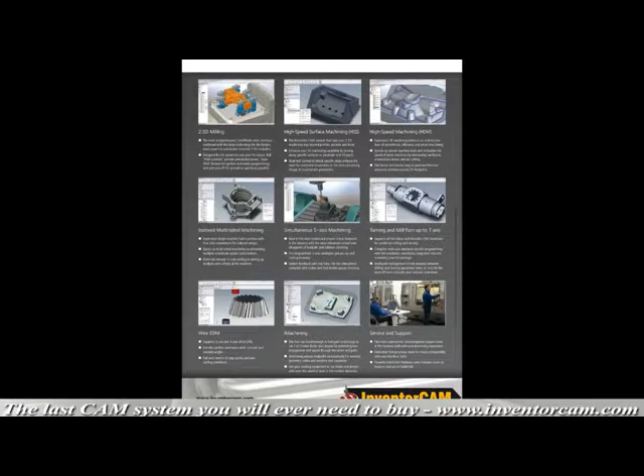InventorCAM has packages that grow right alongside your business. Add a new machine, InventorCAM can program it. Need to cut in more axes? InventorCAM can do it. You simply will not outgrow InventorCAM. It will be the last CAM package you will ever have to buy. Now let's briefly look at the packages in more detail.

2.5D milling. InventorCAM has the most straightforward Inventor-style interface combined with the latest technology for the fastest, most powerful, and easiest way to create 2.5D toolpaths. InventorCAM was designed for the advanced user and the novice. There are full pilot controls that provide unmatched power, and even an autopilot feature recognition that automates the programming and gets you off the ground as quickly as possible.

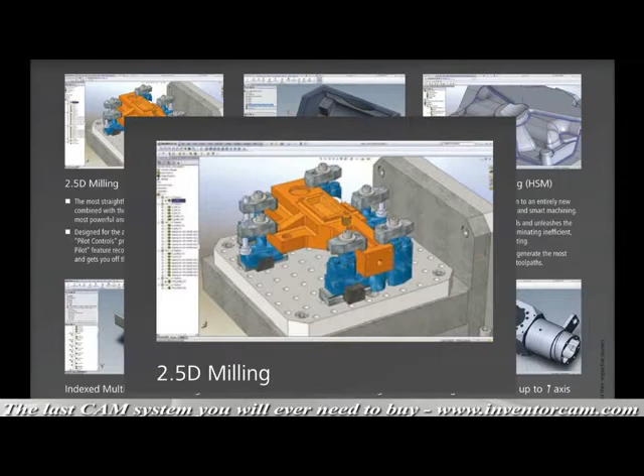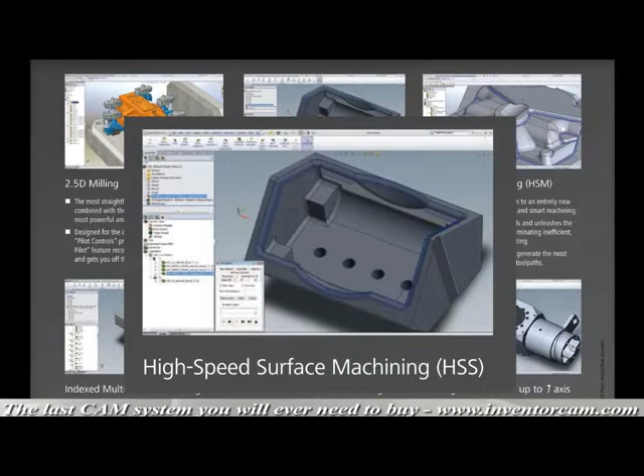HSS High-Speed Surface Machining. This distinctive CAM module takes your 2.5D machining way beyond profiles, pockets, and faces. It enhances your 3D machining capability by driving along specific surfaces on prismatic and 3D parts, with total tool control to attack specific areas without the need for constraint boundaries or time-consuming construction geometries, perfect for doing undercuts and using shaped tools.

HSM High-Speed Machining, the new level in 3D milling. Experience 3D machining taken to an entirely new level of smoothness, efficiency, and smart machining. HSM speeds up slower machine tools and unleashes the speed of faster machines by eliminating inefficient, unnecessary moves and air cutting. This is the fastest and easiest way to generate the most advanced and best quality 3D toolpaths in the business.

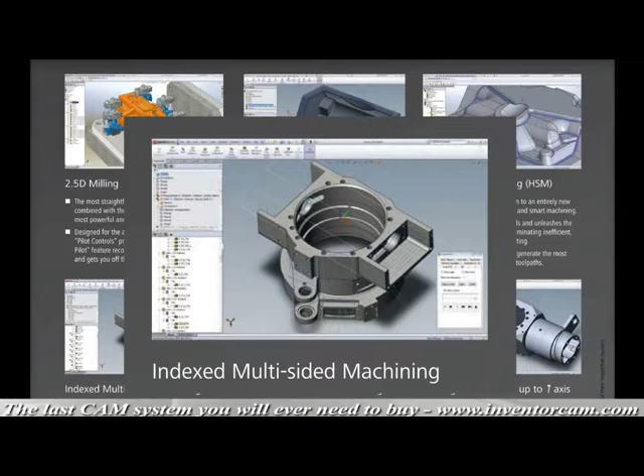Indexed multi-sided machining. Experience single machine home position with one-click orientation for index setups. Speed up multi-sided machining by eliminating multi-coordinate system constructions, and eliminate manual G-code editing or setting up multiple work offsets at the machine.

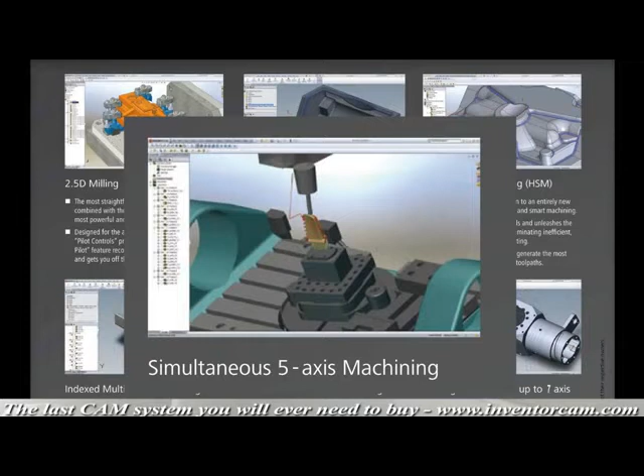Simultaneous 5-axis machining. Trust in the most tested and proven 5-axis toolpaths in the industry, with the most complete control over all aspects of toolpath and collision checking, complete with pre-programmed 5-axis strategies to get you up and cutting extremely quickly. The 5-axis package provides instant feedback with real-time, lifelike simulations, complete with cutter and tool holder gouge checking.

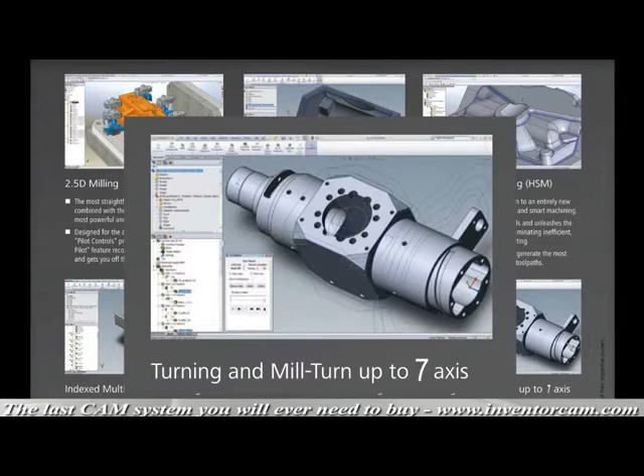Turning and Mill-Turn up to 7 axis. Providing an outstanding solution to the hottest growing segment in the machining market, our Turning and Mill-Turn package supports all the latest multifunction CNC machines for combined milling and turning. We have complete multi-axis and back spindle programming with full simulation, seamlessly integrated into one extremely powerful package. InventorCAM features intelligent management of rest material between milling and turning operations that limits air cuts for the most efficient toolpaths and reduced cycle times.

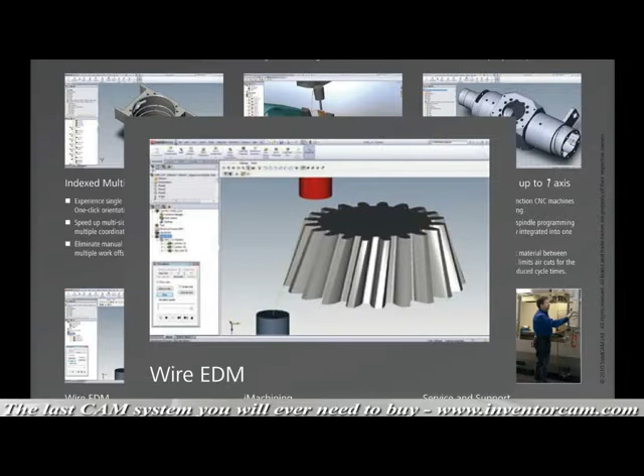Wire EDM. Not just an afterthought like some CAM systems, our Wire EDM is state-of-the-art and supports 2- and 4-axis Wire EDM at an entirely new level. It handles profiles and tapers with constant and variable angles, with full user control of stop points and wire cutting conditions. This is a full-featured, state-of-the-art Wire EDM package.

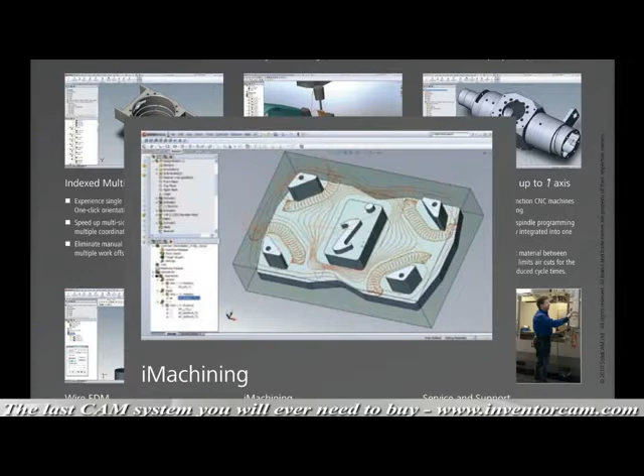iMachining, the first real breakthrough in toolpath technology that cuts 2 to 3 times faster and deeper by optimizing tool engagement and speed through the entire toolpath. iMachining adjusts toolpaths automatically for material, geometry, cutter, and machine tool capability. Use your existing equipment to run faster and deeper with even the smallest tools and the hardest materials. Unlike other systems that leave you guessing at speeds and feeds, iMachining even has a speeds and feeds wizard with 50 years of machining intelligence. It speeds you through the entire iMachining process.

InventorCAM has achieved the coveted Certified 2010 Partner Product Certification. Unlike other CAM systems that just sort of work with Inventor files, we are a certified partner, which is the highest level of integration possible. And we are one of the first ever CAM partners with Inventor. You simply won't find a deeper or higher level of integration than InventorCAM for Inventor.

One of the features our customers say they like most is the Inventor look and feel of our user interface. By running right inside Inventor, the InventorCAM menu looks and feels just like Inventor, so you're never having to use an unfamiliar interface to do your CAM. We've even created a CAM toolbar to be right at your fingertips, so you don't have to go far to do your CAM functions.

Now, of course, your standard feature tree is still going to work for Inventor. We've just incorporated our CAM manager into a very feature tree-like function. If you know Inventor, you know InventorCAM.

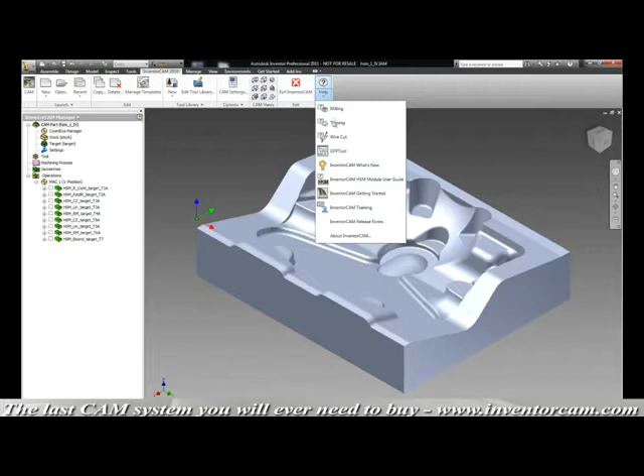Moving to our InventorCAM help menu, you'll see it looks, feels, and acts exactly the same as Inventor's. It contains help topics, getting started guides, videos, and everything you need to get up to speed as quickly as possible in InventorCAM.

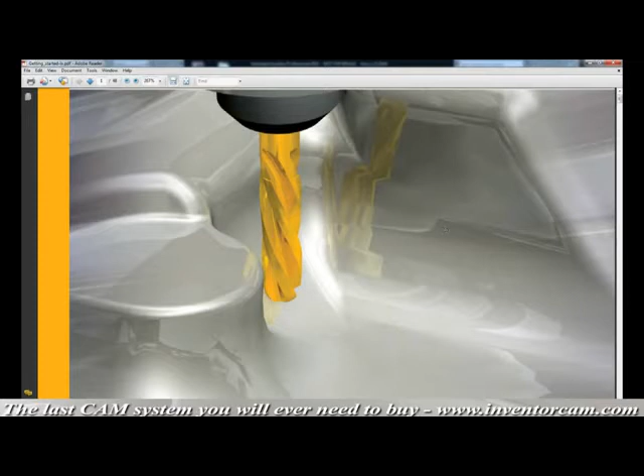Here we're going to show you one of our strongest features, called associativity. When you have a pre-programmed part like you see here, with pockets and holes already set with tool paths, the system will automatically update those tool paths when changes are made.

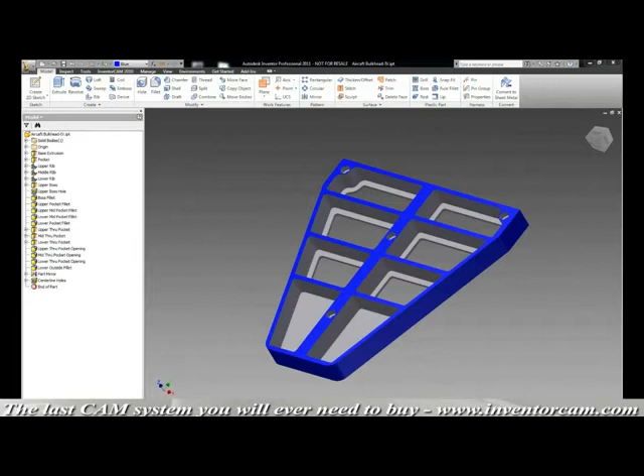Here we're stretching a part that will obsolete every tool path for the pockets as well as the holes. We're going to show you the existing tool paths and how they're completely out of sync with the actual part. Now we're going to go to our CAM manager to synchronize the part. It will update those features and automatically regenerate those tool paths.

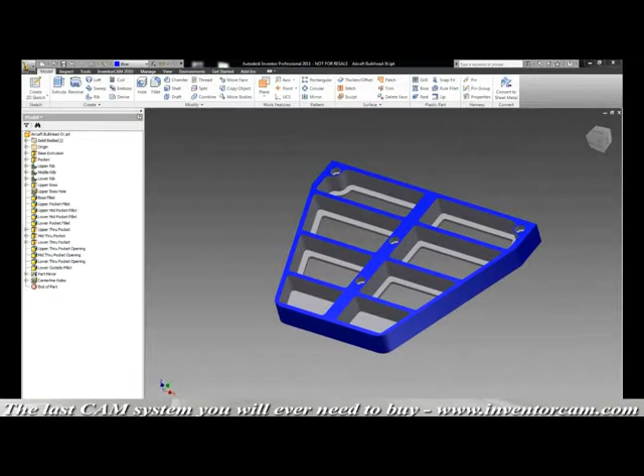So what about parts that are edited by someone outside of the CAM team? Say an engineer in the design department calls up a file like this, and makes the same changes we did before. They stretch that part, and every single tool path becomes completely out of sync with it.

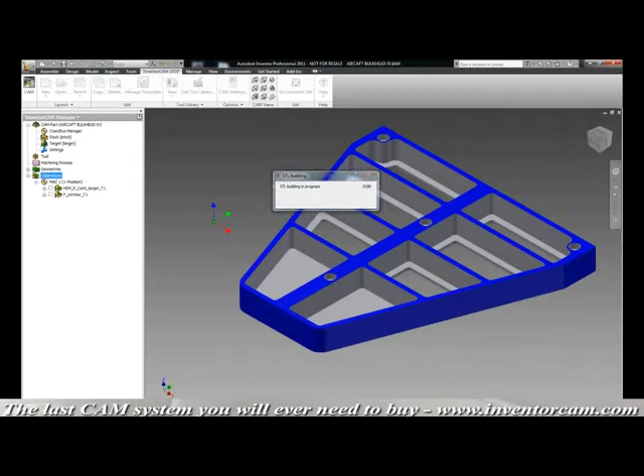InventorCAM is smart enough to know when that part has been changed, and when you open it up the next time, it will tell you that it's been changed, even if it was across a network. You can choose whether to have that part update, as it did here, or you can even ignore those updates.

Once that part is in, all you have to do is resynchronize as before, and those tool paths will update.

Another feature you will never get with a standalone system that isn't integrated in Inventor is the ability to use your Inventor sketches to actually define your geometry. Here we're going to define our geometry directly from the Inventor feature tree by picking the sketch.

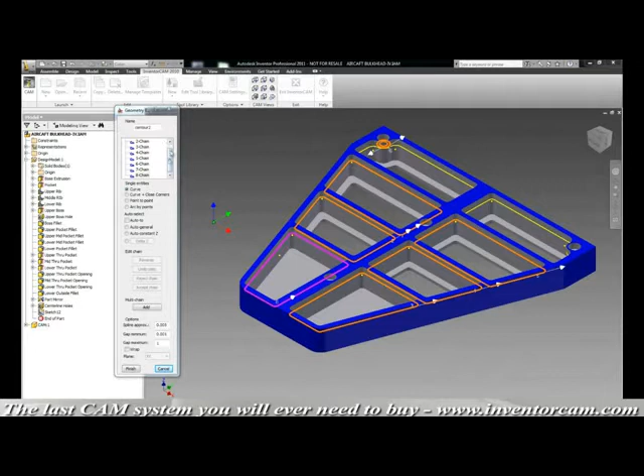Imagine if you had hundreds of pockets in that sketch. You can pick the sketch instead of spending an enormous amount of time picking those pockets one by one from the screen. So here we show that all the chains have been formed directly from the sketch.

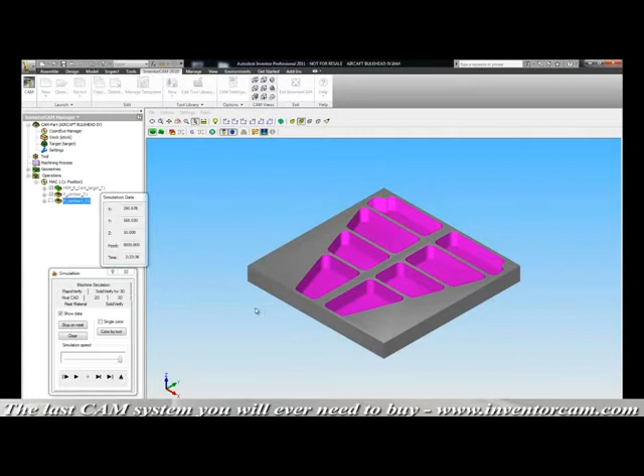At this point, we'll show you the simulation of the tool path. And we'll show another simulation that goes beyond just a simple tool path, to an Inventor model simulation where you can actually see the cuts in the stock.

Now those roughing cuts were made with a fairly large tool, which leaves the radiuses unfinished. We can use the rest material to automatically go back in with a smaller tool and just get the material that's been left behind.

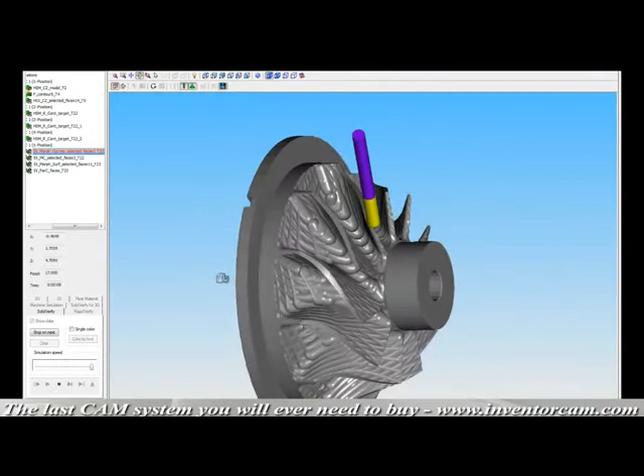Here we're showing that simulation of that tool just picking up the material that's left in the radiuses. This is another example of InventorCAM's amazing simulation tools.

Here we have a very complicated 5-axis part. We're using our Inventor verification tools to actually see the cutter going through the part in the stock, and you can see the progress, the approach angle, and exactly how it's being cut.

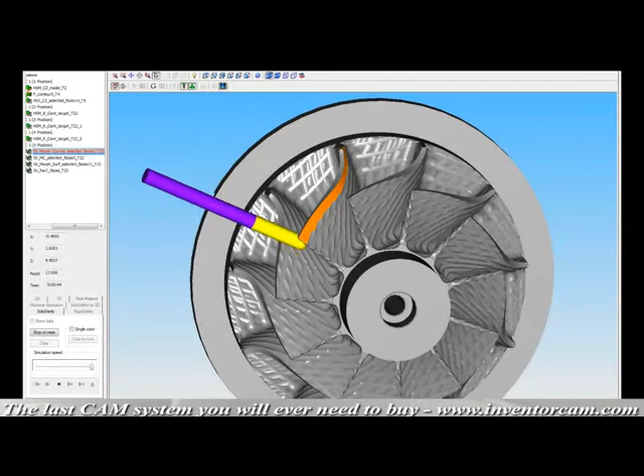And of course, we have full collision protection and gouge protection for this particular simulation.

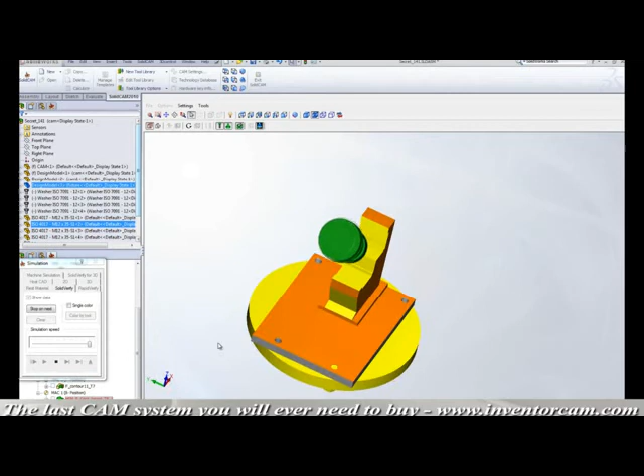Because InventorCAM works directly in the assembly model in Inventor, we can bring in the fixtures, vices, and clamps used in conjunction with the part itself. In this part, we're going to show the simulation and how we can include the actual fixture in the simulation, so you can see exactly how it will run on your machine.

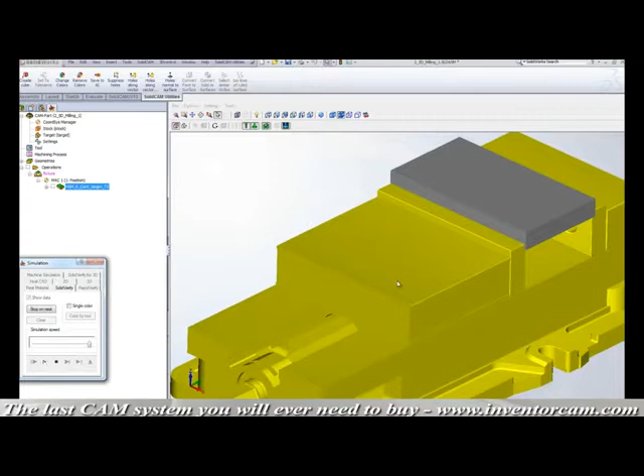For this example, we brought in a common vise to use with this simple part. We can actually designate specific parts as fixtures so they will not be included in the InventorCAM tool path, and will be avoided. Here we're showing in our Inventor model simulation how the cutter never makes contact with your fixture or vise as it goes round and round.

InventorCAM makes sure there is never any contact with any fixture that is being used to hold your part. As we zoom in on this upper corner, you will see your stock being removed, and you will see that your cutting tool never makes contact with the vise.

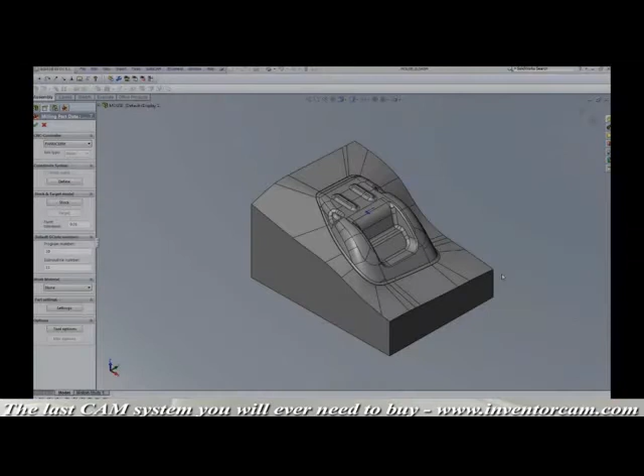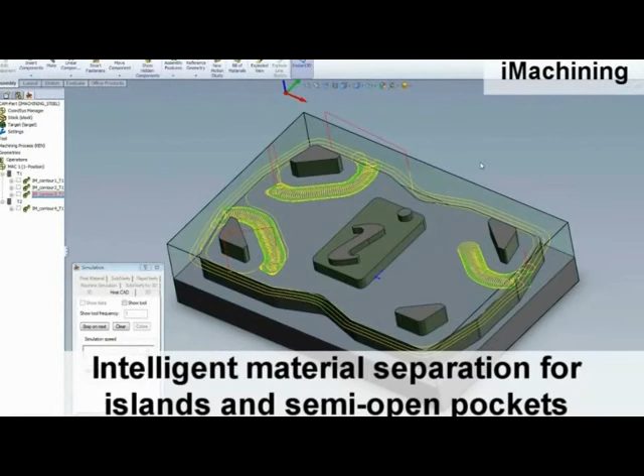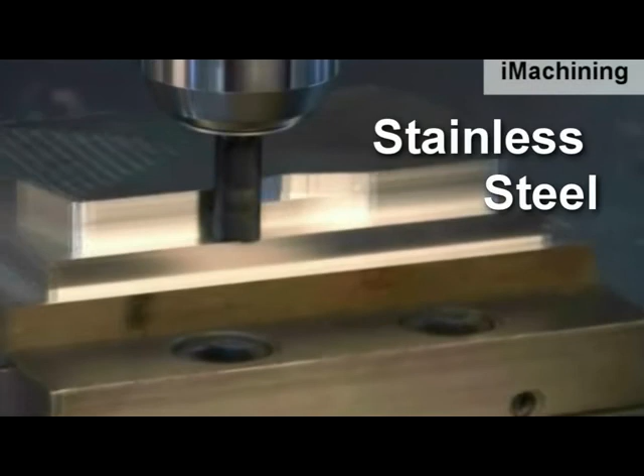With an ever-increasing demand to be faster and more efficient, iMachining gives you the tools you need to create smooth and morphing spiral tool paths that never allow your cutter to get over-engaged. This creates intelligent material removal, complete with separate strategies for islands and semi-open pockets. The results are more efficient toolpaths by automatically increasing machining and programming speed, as well as cutter efficiency by as much as 2 to 3 times.

Now that you have seen what we offer in SolidCAM, you can see there is no reason to use anything else but SolidCAM, integrated in SolidWorks for all your design and manufacturing.

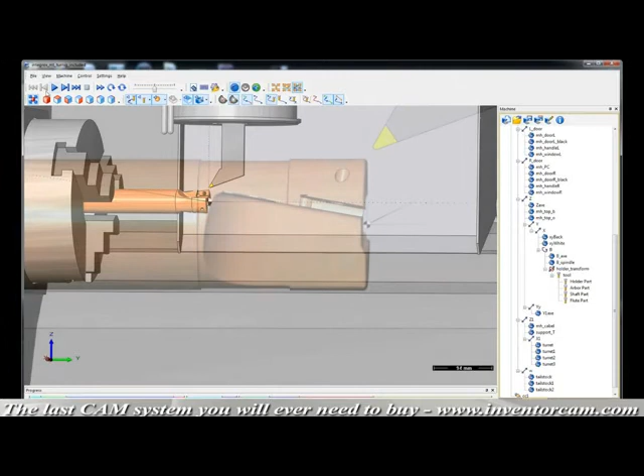One of the hottest growing segments in the machine tool market are Mill-Turn machines. These machines combine milling and turning functions on one machine, but can be extremely complicated to program.

We start by zooming in and show a face cut on the turning. Then we zoom into a side cut on the turning as well. Notice the toolpath is even shown during the simulation.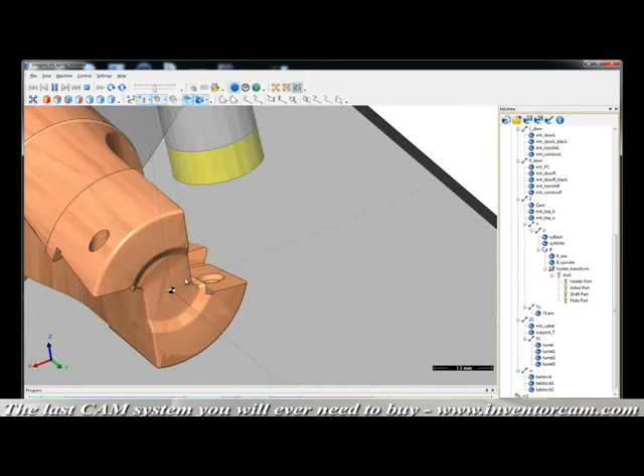As we continue, we can see the mill is now engaging the stock. The only thing missing are the actual chips flying. The machine is now performing a drilling operation.

Now we continue with simultaneous machining.

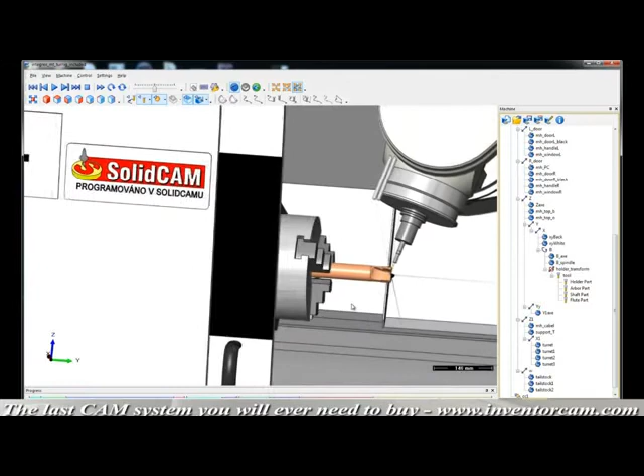SolidCAM handles Mill-Turn machines up to 7 axes, so you never have to worry that your machine needs will outgrow SolidCAM. Here, we have one of the extremely popular Mazak Integrex Mill-Turn machines.

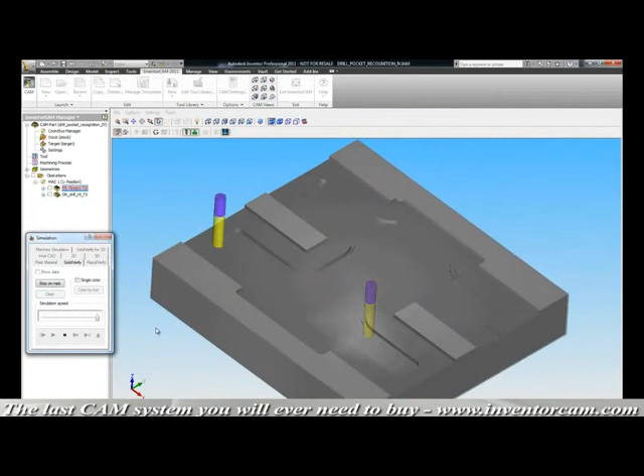Another very powerful feature in SolidCAM is our feature recognition functions. Notice how you can see all the surfaces are being analyzed, with all the pockets being recognized. We will now go ahead and simulate the cutting program for those pockets that it has found.

We just identified all the pockets automatically, saving us a lot of time picking them off the screen or even using the individual sketches from the feature tree.

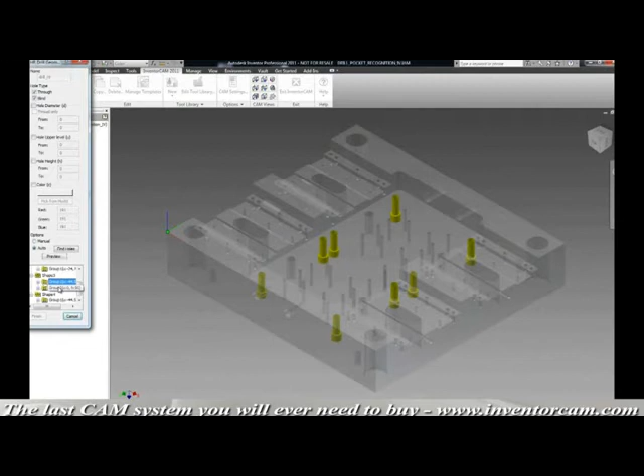InventorCAM also has a very powerful feature recognition system for drilling that will identify all the holes on the parts automatically, saving you a tremendous amount of time trying to pick them off the parts. We can have InventorCAM go through the entire part and immediately identify each hole for drilling. Notice how each hole highlights as we select it from the list.

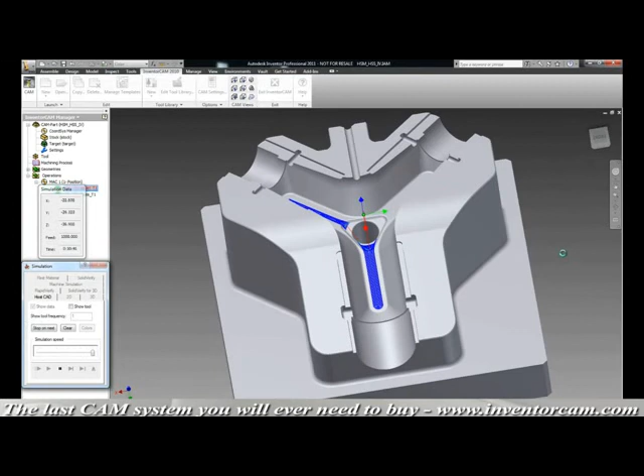The InventorCAM high-speed machining module is one of the most powerful modules available today for 3D machining. It minimizes the retract distance and makes sure the toolpath is as close to the model as possible at all times. Here, we're showing the incredible features available in the HSM module, far beyond that of a standard 3D machining module.

Notice in our wireframe simulation how the toolpath will actually hug the part, and the retracts and repositions will all be as close to the part as possible. See how this reposition follows the contours of the part instead of going back to the retract plane? This saves a lot of wear and tear on the machine, as well as definitely reduces your cycle time.

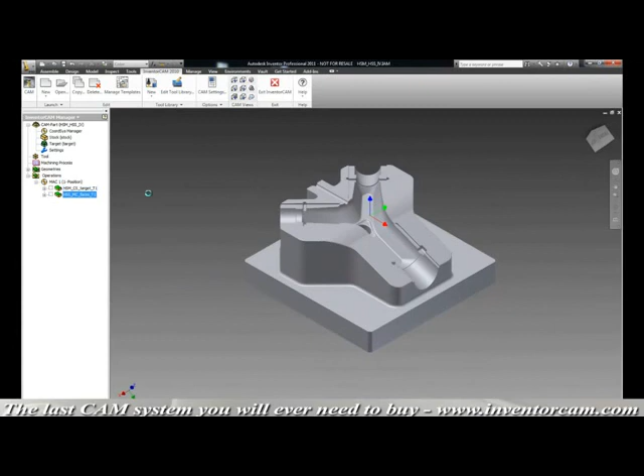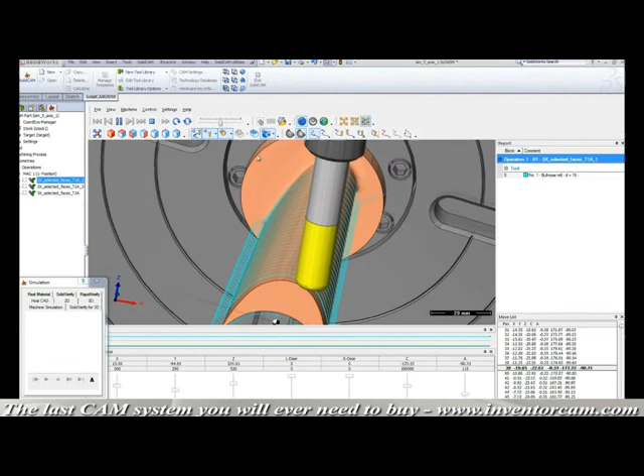InventorCAM's high-speed surfacing, HSS, gives you the ability to concentrate on specific surfaces without creating boundaries. Notice that all we have to do is pick a single surface, and the entire fillet adjacent to it will be machined. As we run the simulation and zoom in, we're looking at how InventorCAM HSS cuts this fillet. As you can see, the tool specifically works on the single surface, all with just a single command.

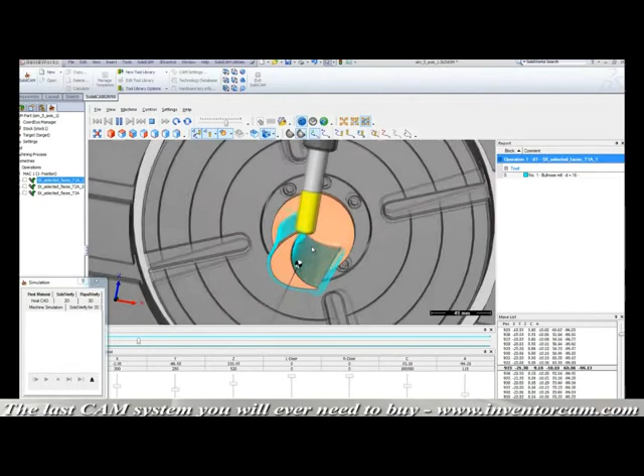For super expensive 5-axis machines, knowing exactly what your machine is doing at a given time is critical. As we zoom in, you can see that we can control the individual axis of rotation to ensure there is no obstruction or conflict between the machine cutter or the part.

You can really see the cutter in action. You can see the contour, the approach angle, and the movements it has to make as it gets in through each part of its toolpath.

Watching your machine cut with your stock and your tooling ensures that you won't have any time-wasting and expensive crashes later on. Thank you for your time and attention.